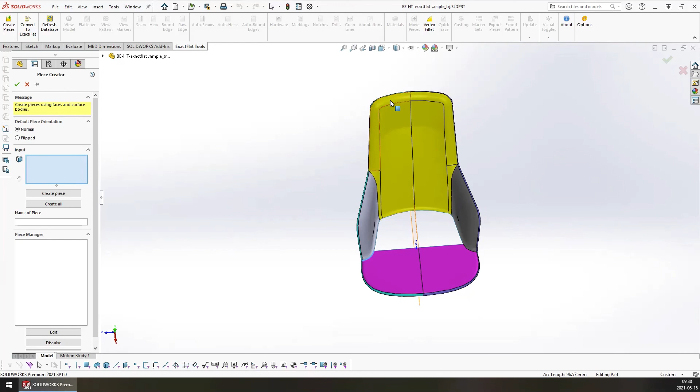With the piece creator, what we can do is simply start selecting faces here, and this will allow us to effectively knit these together. Internally, we're just using the SOLIDWORKS knit surface feature to knit all of these faces together.

As we start picking faces, we're going to notice there is a red arrow emanating from the pattern pieces. This red arrow indicates the facing up direction of your pattern piece. If this fabric were to be laying down on a cutting table, this red arrow would be pointing up towards the ceiling, because this is the finished side of the pattern piece, the side that we actually want facing up towards the ceiling.

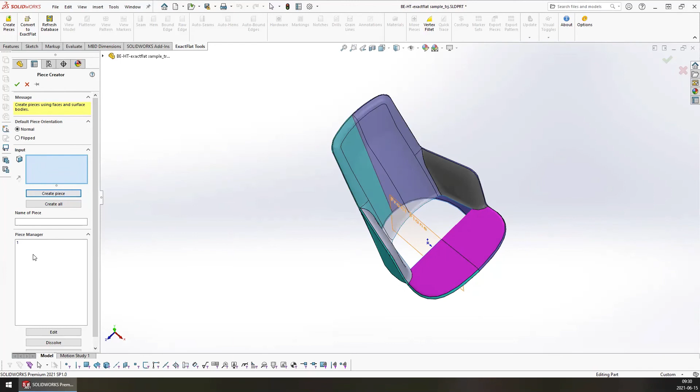All we do is click on the red arrow, and that will flip the orientation of the pattern piece. Once you have your faces selected, you can click the Create Piece button, and this will create your pattern piece. Now down here in the Piece Manager, we have a new piece. Piece number 1 has been added to the Piece Manager.

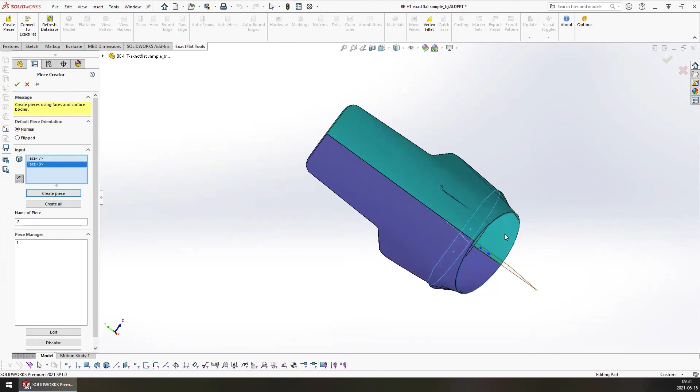We can continue carrying on, selecting additional faces, and as I select additional faces, once again we have that red arrow emanating from the piece. And again, this is in the wrong direction, so we're just going to click on the arrow, and that will flip the orientation of the pattern piece.

If you're noticing that every single pattern piece is being created with an incorrect orientation, you can change the default piece orientation option up here from normal to flipped, and that will automatically flip every single piece orientation as you start creating the pattern piece.

So we have our 2 faces selected, so we will go ahead and click the Create Piece button here to create a new piece in the Piece Manager. You can also use the Enter key on your keyboard to quickly add pieces to the Piece Manager. Once you've selected all your pieces, you can just press Enter, and that will very quickly do the same thing as clicking the Create Pieces button.

As we add our pieces, we will also notice that the pieces are automatically being named for us, in sequential numbers. This name is being generated from the ExactFlat options. You have quite a bit of control over how your pieces are being named, so you can change the template and the format of this name to include things such as file name or the body name, or even SOLIDWORKS custom properties. We will look at that in more detail tomorrow when we talk about the ExactFlat options and the ExactFlat database manager.

If we want to change this name at any time, we can do so either after the piece has been created or while the piece is being created. So for this piece here, if we wanted to give it a more meaningful name, we can simply change the name to whatever we want. So for this piece here, I'm going to call it Inside Right. And because we haven't actually created it yet, we'll go ahead and press Enter on our keyboard to create the piece.

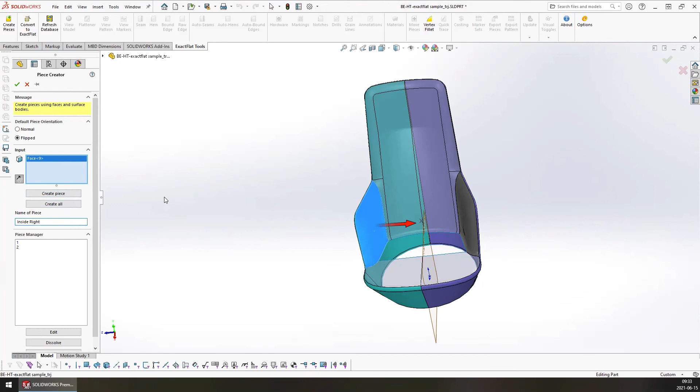We'll go back to these 2 pieces here, and we'll rename these pieces so they're a little more meaningful. So we just select the piece in the Piece Manager, bring our cursor up here, and change the name of the piece. And we'll do the same thing for this one, and we'll finish creating our pieces here.

Once your pieces have been created, we can click the green check mark here, and that will close the PMP and insert the piece creator feature into the feature tree. This is a good point in the workflow to examine your model.

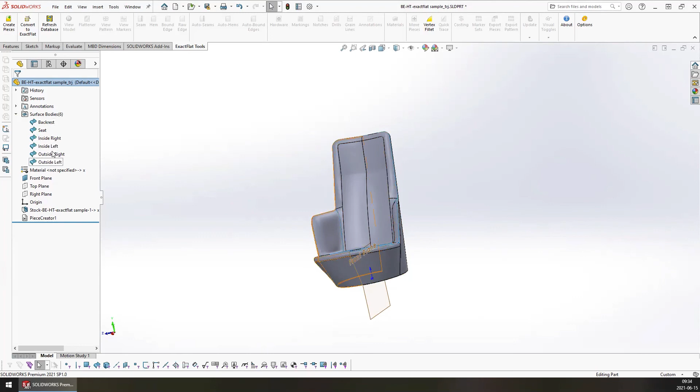You want to make sure that there aren't any holes or gaps, and if we look in the feature tree, specifically the surface body folder, we can see the results of the knit surface feature. Every single piece has now been created as a separate surface body. So we can select each surface body one at a time, and rotate around to make sure that we don't have any extra faces included in our surface body, and to make sure that there aren't any holes or gaps in the surface body. So it looks like our selections are all good.

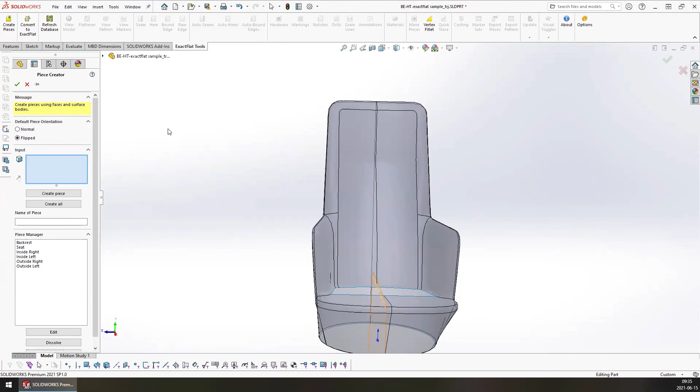If we did notice an issue with the piece selection, we can always go back to the Create Pieces button. We can open up the Piece Creator again, and we have full access to our pattern pieces. So if, for instance, we realize that we no longer need the seat here, we can simply select the seat from the Piece Manager, and we can dissolve that part, and that effectively removes it from the Piece Creator.

If we realize that we forgot to add a part, or if we forgot to include a face in a part, we can simply select that part. So for now, we'll add the seat pieces to the inside pieces. We can select a piece here, edit that piece, and now we can either remove the undesired face by holding Control and clicking on it, or add additional faces by simply selecting them. Once we've made our change, click the Update Piece button to save changes.

We don't actually want to join these two pieces together though, so I'm going to once again edit my piece, and I'm going to remove that face and update my piece. Similarly, if we forgot to add pieces, we can just create a new piece by selecting the faces, give it a name, and click the Create Piece button.

We can now close the Piece Creator and accept changes, and all of our pieces are formed. After we have finished with Piece Creator, we can now start the flattening process. The entry point to the flattening process is the Convert to Exact Flat button.

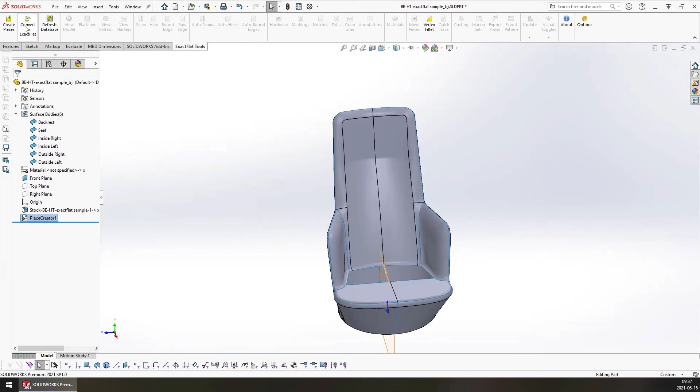Just a reminder, once we click the Convert to Exact Flat button, we will no longer have access to the Piece Creator. We will not be able to modify our pieces or add or remove faces. So make sure that your model is accurate and complete at this point, and then we can move on to Convert to Exact Flat. Once we're happy with our model, click the Convert to Exact Flat button, and this will start the conversion process.

The conversion process will first create a mesh from our model for flattening, and lastly we will assign a material to each piece that we have defined with the Piece Creator.

Exact Flat is a two-stage flattener, so we do our flattening in two separate steps. The first step is a very fast pre-flattener that is applied to the mesh created by SOLIDWORKS. The second stage is the optimizer, where we use the mechanical properties of the material to relax the curvature and the average energy density of the mesh to as close to zero as possible.

The second stage flattening does use the mechanical properties of the material, so that's why we're being asked to pick a material at this point. In addition to setting up the flattener, materials are also used to set up your markers. So each material not only contains a name and description, but it contains the mechanical properties for flattening, as well as the dimensions of the material for nesting.

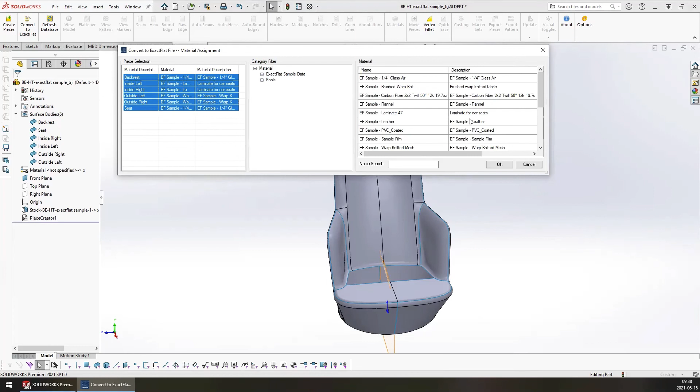From the material selection, we can assign one single material to every single piece, or if your part is designed with multiple materials, we can pick individual pieces here and assign different materials to different pattern pieces. So you can assign as many materials as you want to your different pattern pieces. The only important thing here is that we do assign a material to every single pattern piece. So for this particular model, we're just going to assign laminate for car seats to every single piece here, and we will go ahead and click OK.

After the conversion process, we have our chair, and we can see that the color has changed to pink. So pink is the color associated with the material we selected. If we had selected multiple materials, then we would have seen multiple colors on the car seat, and each pattern piece is color-coded for the specific material that was selected for it.

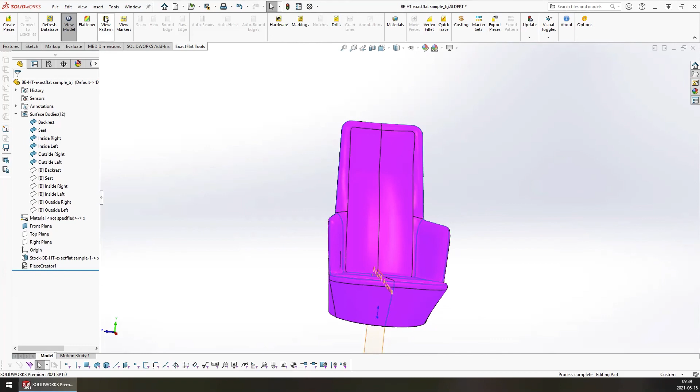Once the conversion process is done, we now have access to the flattener and the View Patterns buttons. So now we're going to click View Patterns, and this is going to bring us to our 2D flat patterns.

From here, we can see the initial unoptimized 2D flat patterns. As I mentioned previously, ExactFlat is a two-stage flattener, so the results we are looking at are simply the results of one of our pre-flatteners. We haven't finished the flattening process. We still need to optimize the shape of our pattern pieces.

To do this, we are going to open up the ExactFlat flattener. And once open, we have access to all of ExactFlat's flattening controls.

The flattening interface is divided into three main areas. At the top, we have our model and pattern viewports. The controls in the viewports are exactly the same as in SOLIDWORKS.

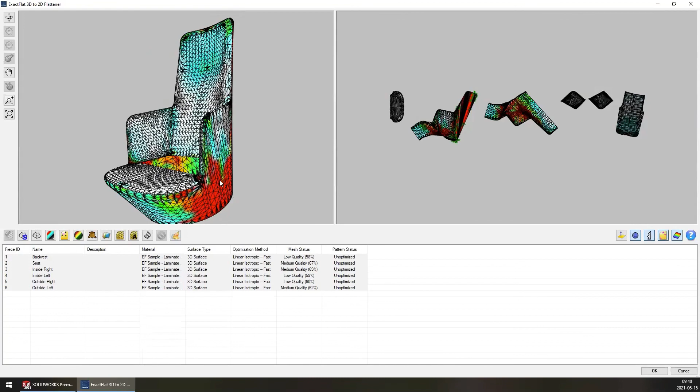We can orbit around our model by holding middle mouse button and dragging our mouse. We can zoom in and out by holding Shift and using our mouse up and down. And we can pan around by holding Control and pressing middle mouse button to pan around our object. The controls are exactly the same in the pattern viewport, with the only difference being we can't orbit around our objects. The pattern viewport is locked to an orthographic projection, but we can still zoom in and out, and we can still pan our camera.

Below the viewports, we have our toolbar. On the left, we have our flattening controls, and on the right, we have our highlights, where we can turn on or off different visual cues. And below that, we have our pattern piece list.

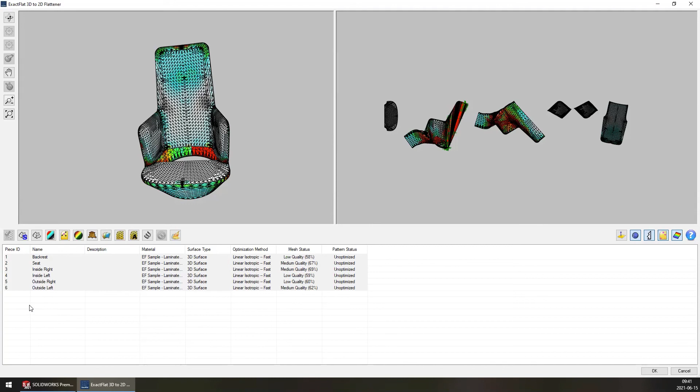Whenever we click any of the flattening controls, that operation is going to be applied to whichever pattern piece is selected down here. So by default, every single pattern piece is selected. However, if we only want to apply an algorithm to a very specific pattern piece, we can single that piece out, or we can select multiple pattern pieces.

We do have multiple highlights that can be turned on or off, and they can be used for many different things. Starting with the first highlight here, this is our piece normal. We can use this to show the normal direction of the pattern pieces, and this is functionally equivalent to the arrow that we saw in the piece creator.

If we turn this on, we will see little black lines emanating from the pattern piece, and these point out towards the facing up direction. So in most cases, you want these lines coming out of your pattern piece. You don't want them going towards the inside. If you see those black lines on the inside of the pattern piece, usually it means your face normal has been reversed, in which case you're going to have to undo the flattening process and then fix your piece orientation in the flattening window.

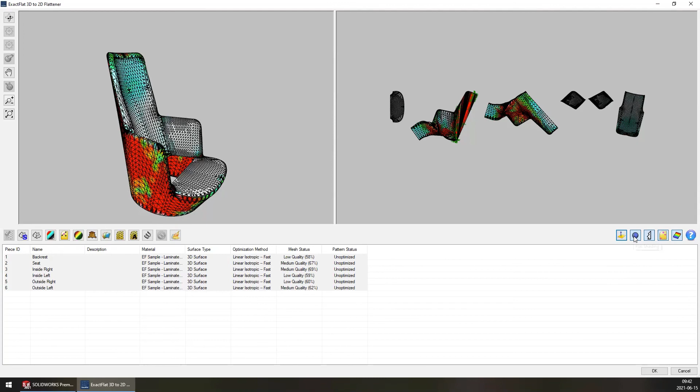The second option here will turn off flat shading, so it will introduce lighting into our document. In most cases, it just makes our model look gray, so it's not a very useful option, so we're going to turn this off. Our third option will turn on or off the edge triangulation, and this is useful if we are trying to examine the strain of the model.

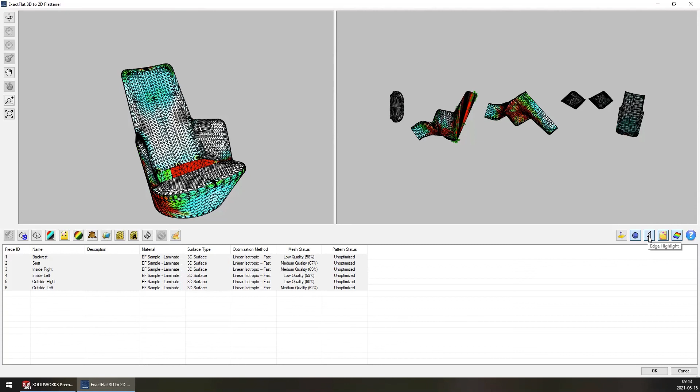It's often easier to examine the strain of the model without the triangulation visible. We can also use the edge highlight and turn it off to make it easier to spot folds and wrinkles in our pattern. If we look at this piece over here, this would be a good example of a pattern piece with folds and wrinkles. Whenever we see these green crosses and inverted triangles, that's an indication that we have a fold or a wrinkle in our pattern piece.

The fourth option is the wrinkle highlight. We don't ever recommend that you turn this off. If you turn it off, it simply hides the folds or wrinkles. But because folds and wrinkles are considered to be patterning errors, it is not recommended to turn that off.

The last option here is the strain map. If we turn this off, we no longer see the strain map on the pattern piece, but it's very useful to turn that off if you're looking for folds and wrinkles. They're very obvious on this piece here, but if our pattern only had one small fold or wrinkle, then turning off the edge highlight and the strain map will make it very easy to pick that out and spot the fold or wrinkle.

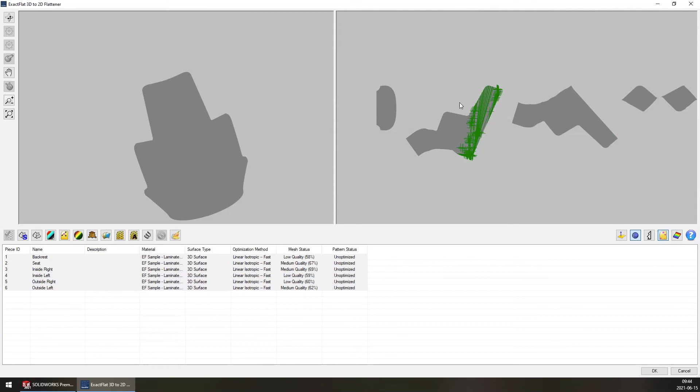So we are going to turn back on the strain map, and we are going to turn on our edge highlight.

Moving on to the flattening controls. Our first group of buttons here are our pre-flatteners. Starting from left to right, we have our Smart Fracture pre-flattener, our Fracture pre-flattener, Stretch Initial, Stretch Minimal or De-Wrinkle, Stretch Round, and lastly, Pelt.

The pre-flatteners are simply 2D algorithms used to take the 3D shape of the mesh and generate a 2D flat pattern. The flat pattern created by the pre-flatteners is not an optimized flat pattern. However, they are very fast and they're used to generate a 2D flat pattern that hopefully doesn't have any folds or wrinkles. We have many different algorithms because different algorithms work better on certain types of geometry, and because of the nature of folds and wrinkles, if one algorithm produces a fold or wrinkle, you can try a different algorithm to produce another flat pattern without folds or wrinkles.

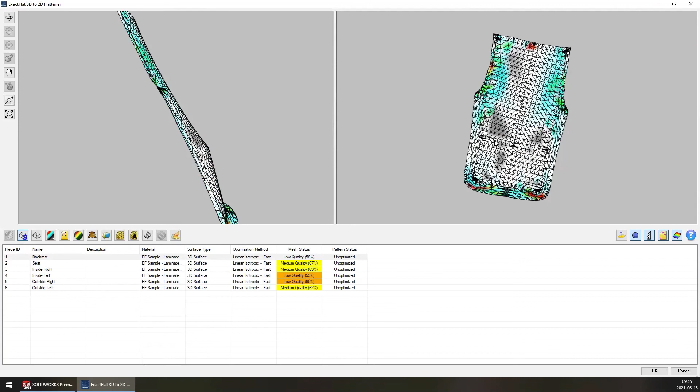Starting with fracture, every time you click the fracture button, we will generate a new unique flat pattern. So we're going to isolate on the backrest here and look at the effects of the pre-flatteners on this particular part. Every time I click the fracture button, we're going to see a new unique 2D flat pattern being generated. In this case, we've got fairly low strain spread through the part, and we don't see any folds or wrinkles. The starting point for fracture is always randomized, and as we fracture a part, we're pushing the material outwards from the starting point. So every time I press this button, we're randomly picking a new starting edge, and we're pushing the material outwards from that starting point.

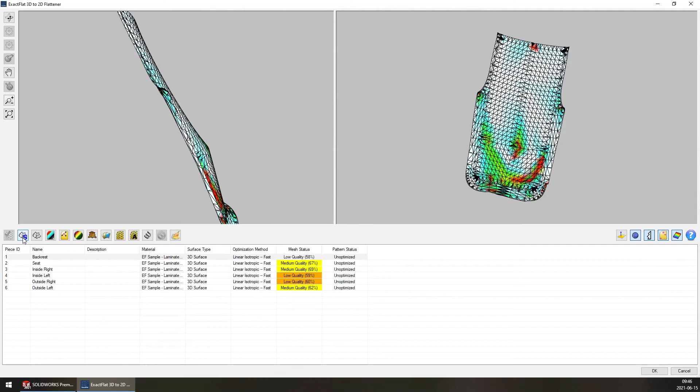Fracture is very similar to Smart Fracture. It doesn't have the same built-in intelligence that Smart Fracture does, so it tends to produce patterns that have more folds and wrinkles, whereas Smart Fracture, when it detects a fold or wrinkle, will attempt to correct that and then finish its algorithm.

Our stretch initial algorithm works very well on pattern pieces that are comprised of 1,000 vertices or fewer. However, once we have more than 1,000 vertices, the results become unpredictable, and we typically start to see this type of result here.

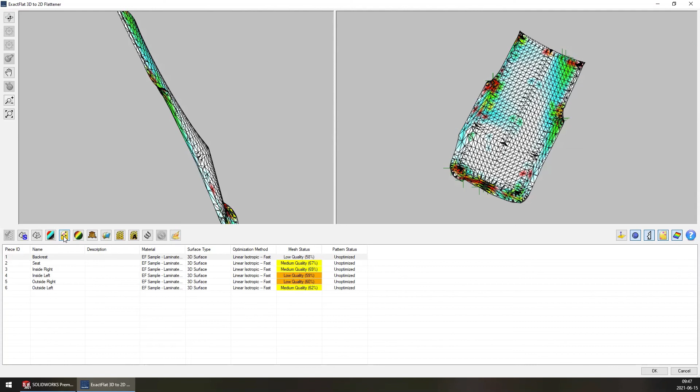De-wrinkle works very well when we have a pattern piece with a shape that is very ideal, such as this, but we have a few folds or wrinkles in it. It is similar to stretch initial, so just like stretch initial, it works really well on pattern pieces under 1,000 vertices. But once we have more than 1,000 vertices, the results become unpredictable. So we'll try de-wrinkle on this piece here, and in this case, it removed most of the folds or wrinkles, but it still produced this spike down here, which is not ideal.

Our round algorithm does exactly what it sounds like. For this one, we'll move to one of the side pieces here, which have fewer vertices. This basically turns your pattern piece into a disc. It's not very useful for this type of shape. However, if we were flattening something like a dome, then this algorithm would become very useful. If all else fails, if every single algorithm fails to produce a pattern free of folds and wrinkles, then round can be used. It might take a little bit longer to optimize, but the important thing is that we don't have any folds or wrinkles when we start the optimization process. So round can be used to get a pattern if no other algorithm is going to succeed.

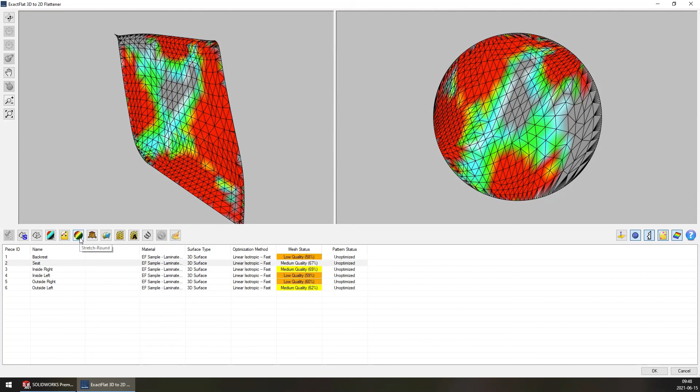Moving back to our backrest, our last algorithm is PELT. This algorithm tends to produce patterns that have moderate strain, but it is almost always guaranteed. Fracture and Smart Fracture tend to give patterns that have the least amount of strain, but they only work on developable surfaces. As you move away from a developable surface, the chance of success with Fracture and Smart Fracture starts to fall. Stretch initial, de-wrinkle, and round only work really well on low vertex count pattern pieces. As soon as you get more than 1,000 vertices, they tend to fail. And then the last one is PELT, which tends to work well on all pattern pieces. However, it tends to produce more strain.

So strain is calculated for every single pattern piece, and as we look at our pattern piece here, we can see different colors on it. If we look at our model as a whole, we can see a rainbow of different colors, and we actually use the color to represent strain and sag on the pattern pieces. As we look at our pieces here, we can see white, cyan, green, yellow, and red, and we use white to indicate no strain or sag on the pattern piece.

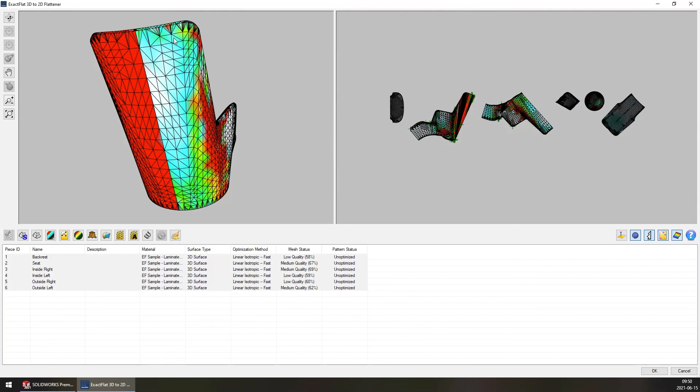So if we had the perfect pattern, we would expect to see the entire surface area of the pattern as white. As we move through the spectrum, cyan represents up to 5% strain, green is up to 10%, yellow is up to 15%, and red is 20% or more.

This allows us to just very quickly glance at our pattern and visually tell how much strain is on that pattern. Strain can best be thought of as how much you're going to have to stretch your material to get it to fit the original shape.

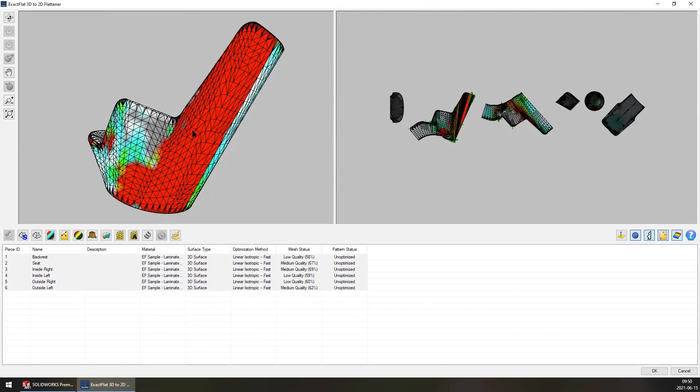So if we look at this piece over here, we have a lot of red on the pattern piece, and that's telling me that the surface area of this section of the piece is much smaller than the actual 3D model. The surface area of the 2D pattern piece is much smaller than the surface area of the 3D model.

So if we were to cut this pattern piece out and try to fit it to the chair here, we'd be stretching our material 20% or more to get it to fit, and ultimately we'd probably tear the material. So we can use the strain map to very quickly tell us how accurate our pattern is, what the quality of the pattern is.

Similarly, the seat pattern right here is pretty much all white. So if we were to cut this out, visually this tells me that we'd have pretty much a perfect fit here. We wouldn't have to stretch our material to get it to fit. It would be a very natural fit.

So with all this in mind, our goal is to eventually optimize our pattern pieces to give us our final optimized shapes. In order to do this, we first need to use a pre-flattener to generate some kind of 2D flat pattern, and this is in most cases done automatically for you during the conversion process. However, if you have folds and wrinkles here, these do need to be fixed before we can optimize.

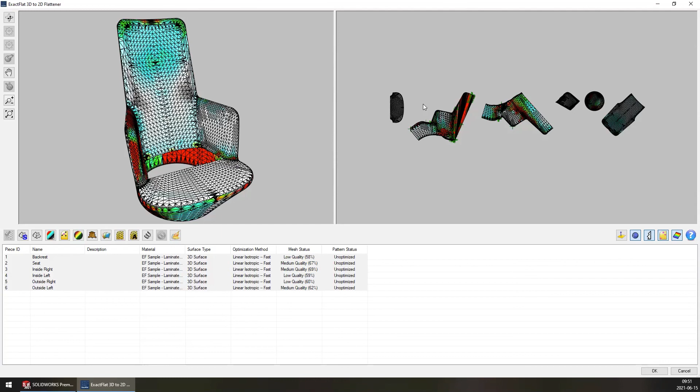So in the case of these pieces here, we need to remove the folds and wrinkles before we can optimize, and the way we do that is just with a different pre-flattener. So for this piece here, we can try our Smart Fracture. This piece is fairly close to a developable surface, so Smart Fracture gave us a pretty nice looking result here.

We can see from the colors that we have fairly low strain all throughout the pattern piece. We're seeing mostly white. We do see a bit of color in these areas here, but overall this is a very good looking pattern, so we can stick to this pattern here.

We'll do the same thing for the outside left. Again, we have folds or wrinkles here identified by the green check marks, so we are going to try a different pre-flattener. We will try Smart Fracture, and again we've removed the folds and wrinkles. We've lowered the strain on the pattern piece, so this is a good starting point.

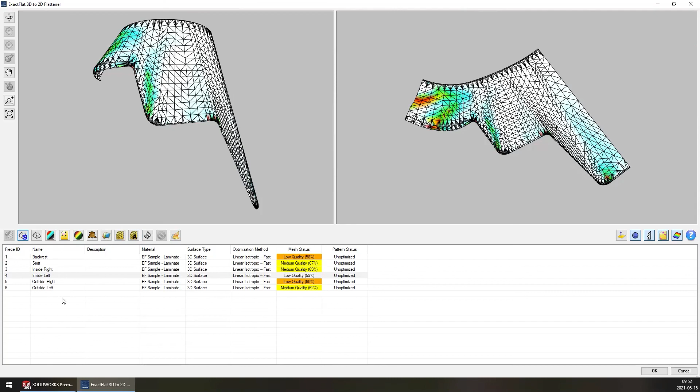As we look at our whole model, we don't have a lot of pattern pieces. Our seat is still a circle, so we'll focus on the seat and do Smart Fracture to that. And now we have a much nicer looking pattern there. So in terms of optimization, this would be a good starting point.

We've used the pre-flatteners to generate a 2D pattern, and we've used them to remove the folds and wrinkles from the pattern piece. Additionally, as we use the pre-flatteners, we also reduced the amount of strain in the pattern pieces, which is ideal for optimization.

So our three main goals for the pre-flatteners are: first and foremost, we want them to generate a 2D pattern for us. Second, we want to use them to remove folds and wrinkles from the pattern pieces. And third, we want to use them to reduce the strain as much as possible before optimizing the pattern piece.

The performance of the optimizers, our second stage flattener, is dependent on a couple of different things. First, it's dependent on the number of triangles or vertices being optimized in the mesh. Second, it's dependent on the amount of strain in the mesh that has to be resolved.

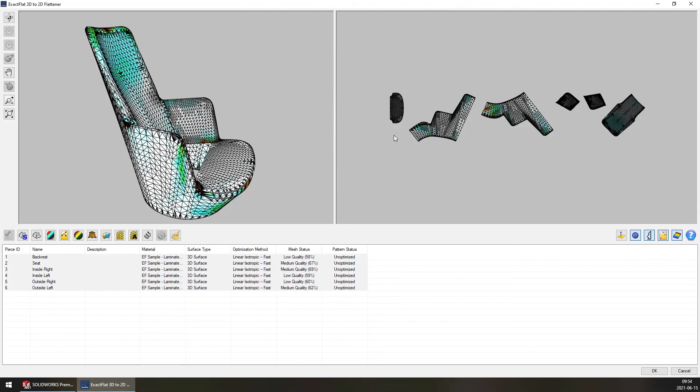So this ties back into our pre-flatteners. As we pre-flattened our side pieces here, the color went from red to pretty much white. So if we had optimized them as pure red, that's 20% or more strain, it would have taken longer to optimize than what we have now with them being pure white.

The more strain you can remove with a pre-flattener, the better. In a typical workflow, you would open up your flattener window and run one of our uniform remeshers, which we'll look at next, to reduce the triangle and vertex count of your mesh. Then you would use a pre-flattener to remove any folds or wrinkles in your mesh, and also to reduce strain, since pre-flatteners are so fast we can use them for that. Then we can ultimately optimize the pattern pieces.

Moving on from our pre-flatteners, our next grouping of tools is the material editor. If during the conversion process you accidentally click cancel, or forgot to assign a material to a pattern piece, you can do that in two different ways—we'll look at the other way after we're finished with the flattener window. If you forgot to assign a material, you can click this button, which opens the material selection interface and lets you assign a material to your pattern piece.

As I mentioned previously, materials contain the mechanical properties of your fabric. You need to assign a material to your pattern piece in order to optimize it—that's the second stage flattener. You will not be able to do that until you assign a material to your pattern piece.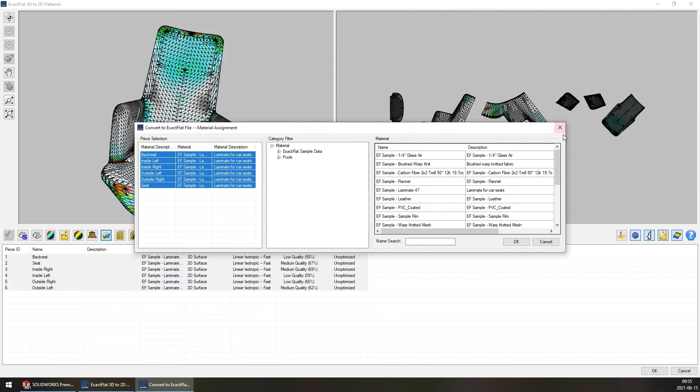Our next grouping of icons are our remeshers. We have our uniform remesher and our adaptive remesher. These two tools have the exact same goal: they analyze the curvature and 3D shape of a mesh and produce a new mesh over the original with a lower polygon or vertex count. The two remeshers function slightly differently from one another.

With the uniform remesher, we typically set a target vertex count and some fidelity constraints, which we change in the ExactFlat options—we'll look at how to change these tomorrow. So with this tool, we set a target vertex count, and the uniform remesher will remesh to that target count.

The adaptive remesher differs in that we simply specify the maximum allowed distance from the old mesh to the new mesh. We can set that maximum allowed distance in terms of surface to surface, or boundary to boundary, and we also set the minimum allowed edge length of any triangle edge. Using that information, the adaptive remesher automatically determines how many triangles to place on the mesh to minimize triangle and vertex count while maintaining the curvature of the mesh.

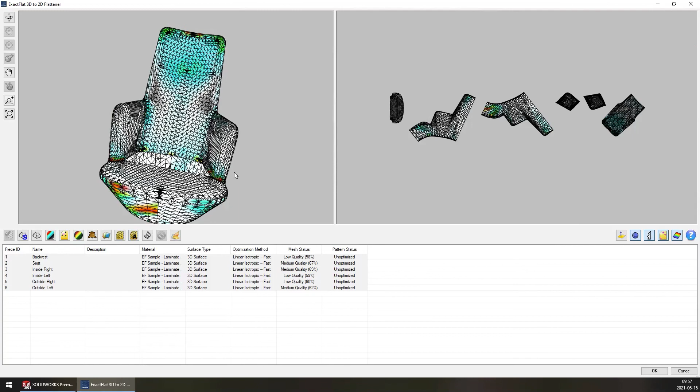In a normal workflow, I'd recommend using the adaptive remesher—it typically produces a really nice looking mesh. But for this particular seat, because of the heavy double curvature, especially around the arms, and the complexity of the triangulation, we actually get a better result using the uniform remesher. So for this chair, we're going to use the uniform remesher, even though in a normal workflow we'd recommend the adaptive remesher.

Our next icon is the optimize icon. When we click this, we launch the optimization process—we'll look at the remeshers and the optimize icon in more detail once we finish up with our toolbar. When we click this, it starts the optimization process, which relaxes all the strain on the pattern pieces to as close to zero as possible, minimizing the average energy density across the pattern.

Our next icon here appears if we are running one of the remeshers or the optimizer—this will halt the optimizer or the adaptive remesher. So if you start a process and realize you're not ready, say I accidentally click the optimize button before I'm ready, I can cancel the optimization and it won't apply any changes to the pattern pieces.

Our last icon here is the broom icon. If we do some kind of operation—let's say for this chair I know the adaptive remesher isn't the best choice, so I accidentally click that and want to undo the effects of the adaptive remesher—this is the tool to use.

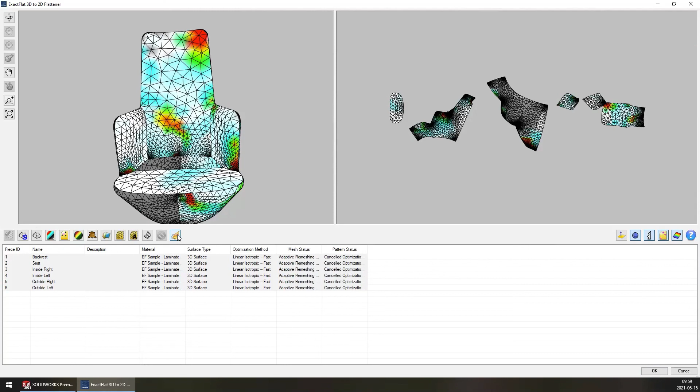I can click the broom icon here, and this will essentially restore the original input mesh that was generated by SOLIDWORKS. After clicking this, I'm going to see my original mesh being restored. There's a lot of different buttons here.

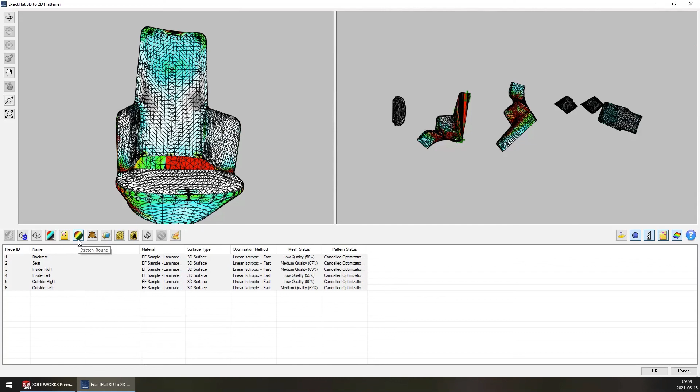However, in a typical workflow, you don't need to press all of them. The only time we really need to play with the pre-flattener buttons is if we notice any kind of fold or wrinkle on our pattern, or if we have an extreme amount of strain on it. If we saw after remeshing or after flattening one of our pieces was red like this, that would be a good use case for using a pre-flattener on that piece.

But in a typical workflow, all we do is when we open up the flattener window, we would remesh our model, and then after remeshing, we would optimize the model. So even though we have all these controls here, in a typical workflow we only press 2 buttons.

After opening the flattener window, normally what we do is we just remesh. In this case, I'm going to use the uniform remesher. As this is running, we can see it's reducing the triangle and vertex count. Once that's finished, we would then optimize our pattern pieces.

So we'll start the optimization process, and very quickly we are going to see ExactFlat take over, slightly changing the shape of our pattern pieces. As the shape is changing, we're going to turn our edge highlight off to make this easier to see.

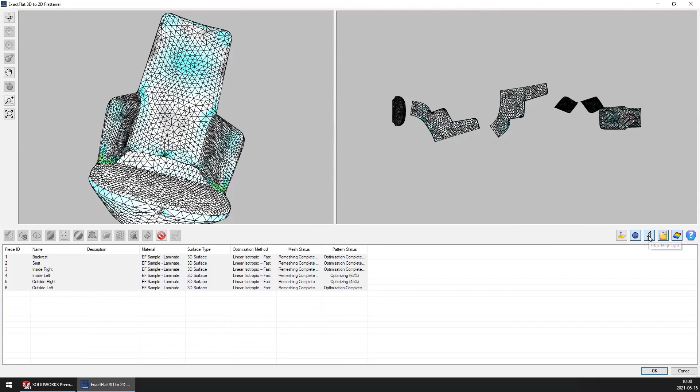We can also see the strain on the pattern being relaxed and minimized, and we can tell that just by the color of the pattern pieces. For most pieces, we have mostly white, indicating no strain. We have tiny bits of cyan on our pieces, which tells us we have up to 5% strain. In some pieces, we actually have a bit of gray.

Gray represents sag on the pattern pieces. If we see sag, that tells us we have a bit of excess material, and that may manifest itself on the final sewn product as puckering or fingers of material, just because there's an excess of material in that area. We can use this to help us make decisions on how to refine our pattern.

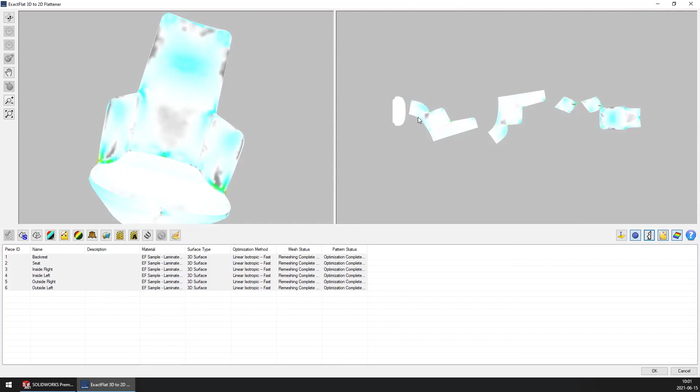If this is okay for your pattern, then you don't have to make any change. But if you don't want any sag, let's say right here, this may be an indication that we might have to split this part into multiple pieces, or we might have to add a dart or a relief cut.

And we can do that simply by undoing the flattening process, and we can split our part either in half, or we can split out a small dart of material and then redo the flattening process without that dart of material. At this point, we have remeshed our part and we have optimized it.

So assuming we don't have any folds or wrinkles and our part has been sufficiently optimized, we can then click the OK button, and this is going to update our planar surfaces in the SOLIDWORKS environment with the results of our flattening process.

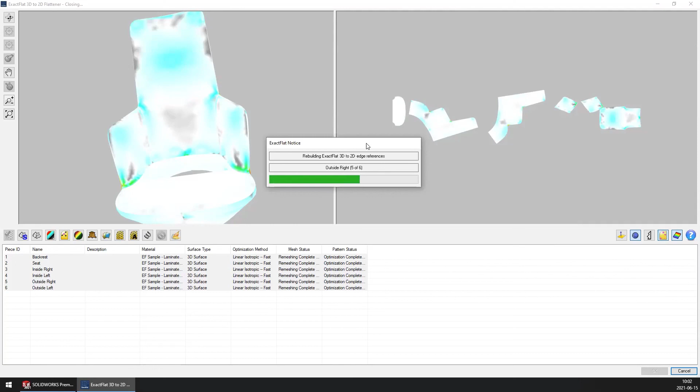After flattening, we have our optimized 2D pattern pieces here in the pattern viewport. From here, we can start our patterning process. It's difficult to really tell where these different pattern pieces go and how they sew together, so the first thing we normally recommend is using the Move Pieces tool to arrange our pattern pieces.

The tool has a variety of different modes. The first mode is the translation tool, and this tool allows you to simply drag and drop your pattern pieces. So I'm dragging this piece around. We can see the gray highlight of where my pattern piece is going to go, and when I release my mouse button, the piece is moved up there. Internally, this just uses Move Copy Bodies, so you can manually insert your own Move Copy Bodies. However, the Move Pieces tool is a much easier way to just drag and drop your pattern pieces.

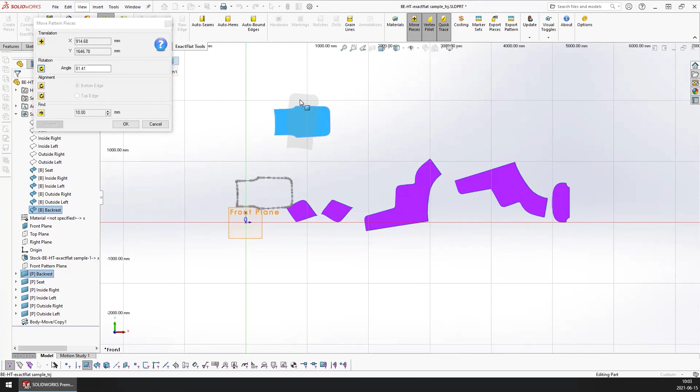We also have a rotation tool. With this tool, when it's active, when I click my mouse button and drag, I'm rotating my pattern piece. Again, we can see that gray preview of where the pattern piece is going to go. So we can rotate this to however much we want, and it will rotate our pattern piece for us.

We have two alignment tools: our vertical and horizontal alignment tools. For horizontal alignment, we can pick either a bottom edge or a top edge, and for vertical alignment, we can pick either a left edge or a right edge. We use these to help align our pattern pieces so they are in the correct orientation.

If we look at these two pieces down here, we've got very long straight edges. We know these are on the backrest, and we know these edges should be perfectly up and down.

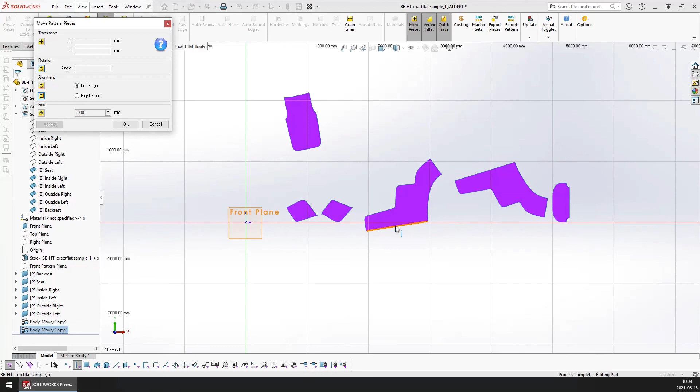So we can use our vertical alignment tool to help arrange these pattern pieces. For this piece down here, I know this is supposed to be on the left-hand side. I've got my vertical alignment tool selected with the left edge selected, and when I click and hold on this piece, we can see it's rotating so that selection point is perfectly up and down. I'm just going to move this piece up here.

Our last tool is our Find tool. This tool is used to find neighboring pattern pieces. We can set an optional offset here. I like to give myself a lot of extra material, so I'm going to change this to 300 millimeters to give myself a lot of space.

When I click on an edge, again, I'm going to click and hold. We have our preview on the left-hand side, and we also have a green dot appearing on that edge. For this particular edge, because it's pretty much straight, we're not going to notice a big difference. But as I move my cursor up and down, we can see our gray preview rotating, so the pattern piece is tangent at this green point.

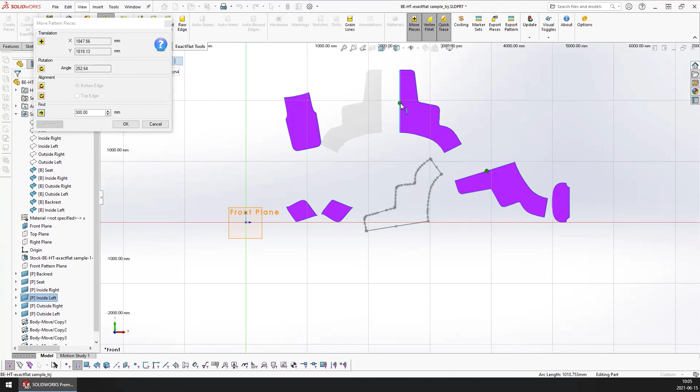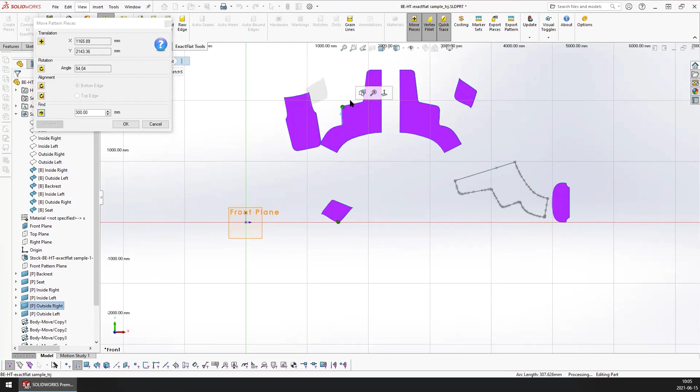We'll notice a bigger difference over here as we start finding this neighboring piece. As I move my mouse, it's rotating my pattern piece, so my two pieces are tangent at that same point at a distance of whatever my offset was set. Once we have a desired location set, just release your mouse button and Exact Flat will snap the pattern piece to that location.

Find our top piece up there. And then this piece kind of sits down here, but it might be better just to move that up here. So what I'm going to do is use my bottom edge alignment tool, rotate that to a bottom edge, and just translate this piece up here like that.

So now that our pieces have been arranged, it becomes pretty clear how this sews together, so we can start adding our seams and hems. If after using the Move Piece tool or any other tool you notice that your seam and hem tools are not available, just click in the empty white space here and that will reactivate the toolbar for you.

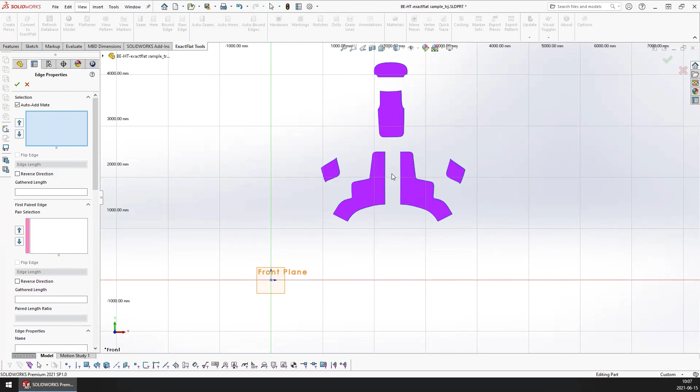Now that we have access to our seam and hems tool, we will open up the seam tool and start to add seams to our pattern piece. It's very important that you think of seams as individual sewing operations - you have to create your seams the way they would actually be sewn together in the assembly process.

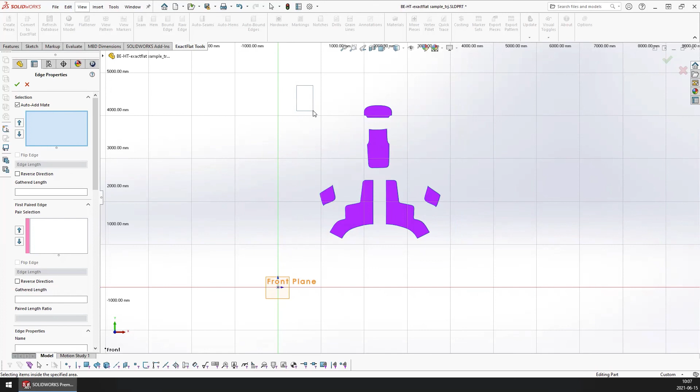A lot of times, people will tend to just rectangle select everything, and if you do that, you'll probably succeed in adding your seam allowance to your pattern pieces. However, none of your notches are going to align, simply because you're considering every single edge in the document as one side of a sewing operation. So you need to consider this as a sewing operation, and when selecting edges, you want to select them in the order that they would be sewn together.

So if we zoom in on this part here, we have one really big long edge in the center, but a very small tiny edge down here at the bottom and a tiny edge at the top. So we want to make sure we select them in order. We'll start here at the bottom and select that edge, and as I select it, we have a green dot showing the start of that edge, and a red dot showing the end of that edge.

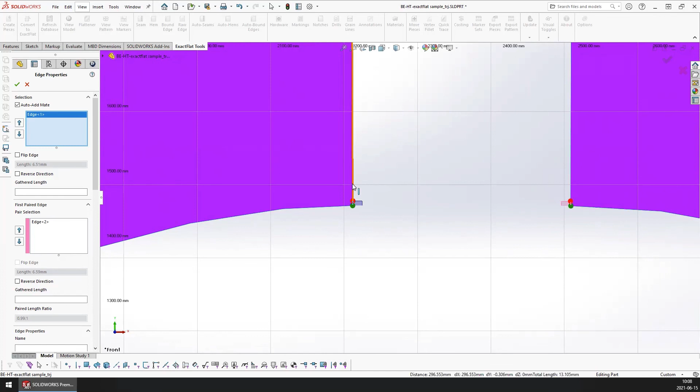We can also see the additional material that has been automatically added to our part as part of our seam allowance. If we zoom out, we can see on the neighboring pattern piece we have the exact same information being shown - our green dot at the bottom and red dot at the top. As we start selecting additional edges, we can see our seam being expanded, and we'll make sure we pick our final edge. So Exact Flat automatically recognizes and finds the neighboring edges for us.

It's really important that we want to make sure that the seam starts and stops on the exact same side. So in the case of this particular edge, both our green dots are at the bottom, and on both sides we're sewing up the pattern piece and stopping at the red dots up here. If for whatever reason one side was reversed and not in the correct orientation, in the seam PMP we can simply click the reverse direction button to reverse the direction of one of our sides.

Scrolling down, we can do additional things to our seams. If, for documentation purposes in SOLIDWORKS drawings, we wanted to add a seam table with more specific information, we can give our edge a name. For the purposes of this demo, I'm just going to leave this empty. But if we were to give our edge a name and add an edge table, the edge name would appear in that edge table for descriptive purposes.

Below that, we have our seam properties. This is where we can adjust the amount of additional material being added to our seam. For this particular file, my default is a 1/2 inch pinch. If I wanted to change this, I can do that by changing my seam type. If I select 6mm join, we can see material has been removed from our seam allowance on both the right and left hand side. As I pick additional seams, we can see the amount of material changing depending on my type of seam.

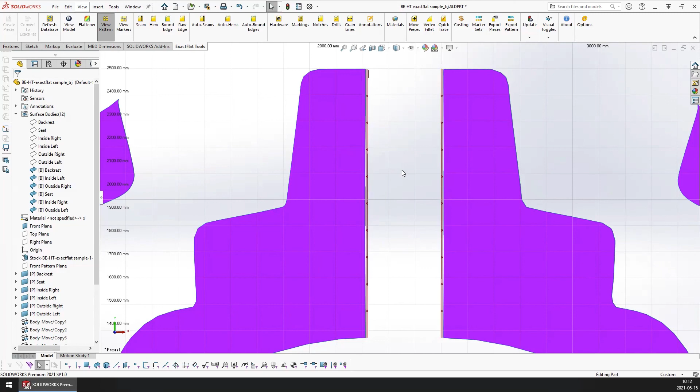If you notice that you already have a seam there, just click the red X to close the PMP, then click in the white space to deselect your edge. This will allow you to create a new seam. Another option is to pre-select your edges first, which guarantees you will open your seam PMP in create mode, eliminating the chances of opening the PMP in edit mode.

So we're going to add the next length of seam down this side here. We select our top edges, open up the seam PMP, and ExactFlat will automatically detect our neighboring edges for us.

ExactFlat remembers the last settings used, so because we already configured our previous seam to be a 10 millimeter join with a notch chain with 9 counts, ExactFlat automatically applies those settings to every single seam created afterwards. So the previous seam settings will always be applied to the next seam.

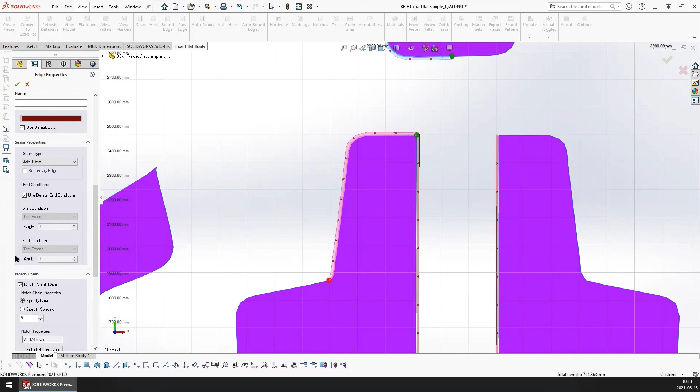We're going to have a look at end conditions and how they work. These are applied to the ends of a seam. On this particular seam here, we can see we have our green dot there, and we have 2 seams coming together. So the default end condition for most of our seams is trim extend, and what that does is, instead of having our seam simply extending from the edge, it's going to extend our seam line and trim it at the intersection point of where the 2 seams meet. We can change the default end conditions by turning off use default end conditions, and this gives us access to all of our different end condition types.

Trim extend is the default. Our other types are chamfer angle and chamfer to corner angle.

So if I change this edge to chamfer angle, we can see that we are no longer trimming or extending the edge and trimming it. The angle is always going to be a deflection angle from the perpendicular direction of the edge at that point. So 0 is no deflection, so we have basically a mitered edge here. If I change this to, for instance, 45 degrees, we're going to notice that edge is now being rotated 45 degrees inwards. So you can change your chamfer angle to whatever you want. This is very useful for hiding excess information or excess material, so you don't have a large amount of material balling or bunching up at your corner of your seam.

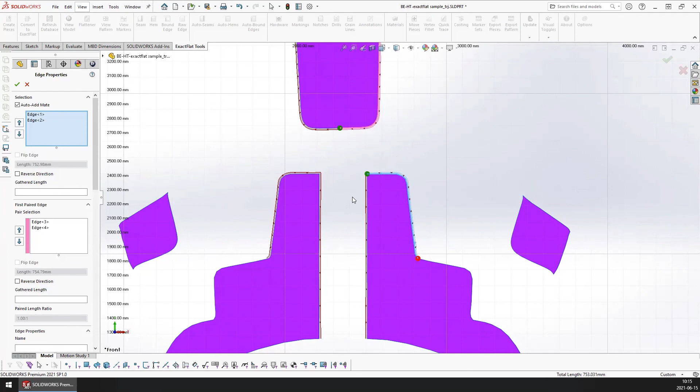So we can carry on adding seams to the remainder of the part. In most cases, because ExactFlat automatically applies the last settings used, all you have to do is select your edges, open up the seam PMP, and then you can click the OK button, and ExactFlat will create your seam for you.

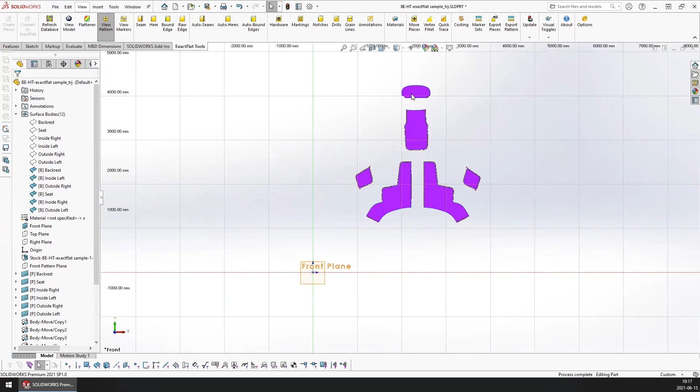For our last few seams down here, this is where parts of our cushion sew together. So we will create our seam along the front here.

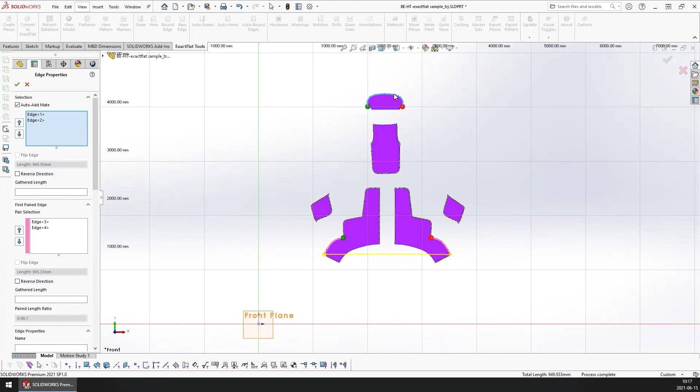And in this case, we can see our seam is actually jumping from one piece to the next. So that's telling us that even though we have one continuous piece of material here, this sews to a composite of two different pieces. This isn't necessarily a bad thing, and this is quite common. So the jumper just tells you that our seam is starting over here, and then it jumps over to this piece here.

For the bottom of our chair, we may want to add a hem or additional material to include a drawstring. So if we wanted to do that, we can use the hem tool. The hem tool is almost functionally identical to the seam tool, and they both kind of do the same thing. The only difference is the hem tool is a single-sided operation. So with a seam, we are adding additional material to two sides of the pattern piece, the right and the left-hand side. With hem, we are only adding additional material to one side.

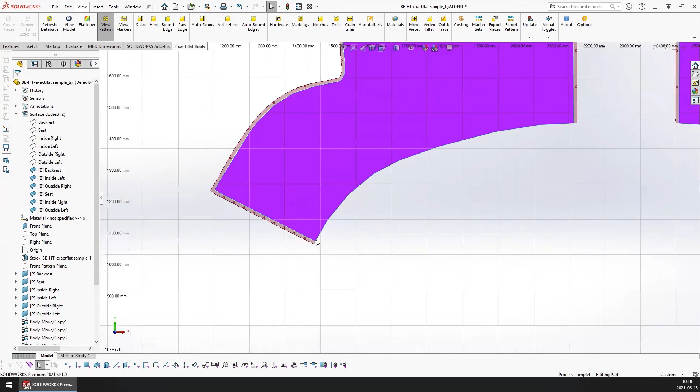So we will start by selecting our edge. Now we can open up the hem tool. And unlike the seam tool, we only have our primary selection here. Most of the tool is exactly the same. We still have our hem properties. This is where we can choose additional material, so whatever hem type you need, you can select that from the list.

For my case, I'm going to pick 2-inch hem because I want to create a nice pocket for a drawstring. And now we have our additional 2 inches of material added. If we scroll down, we have access to the notch chain for this particular part. I don't really need notch chain on my hem, so I'm going to turn that off. And now I can apply the exact same hem to this piece over here.

For this piece here, this simply sews to another part of quilting that was not included in the model. So this should actually be a seam. However, we don't have the adjacent pattern piece in the model, so I'm just going to treat this as a hem. I'm going to change this to 8 millimeters.

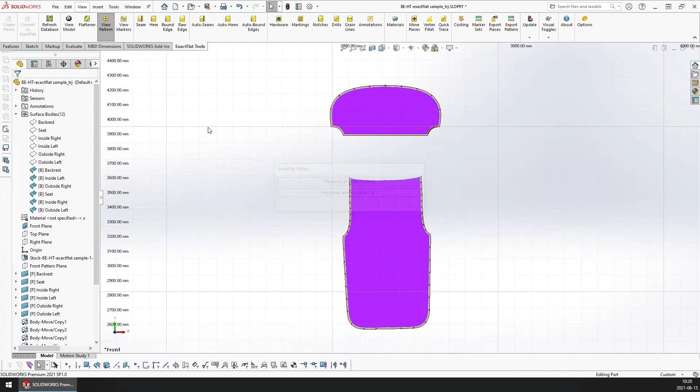So once we have applied all of our patterning information to our chair, I'm actually going to turn the notch chain off for this particular seam here. And we'll leave that alone.

So once we've added our seams to our part, we can then move on. We can start adding things like hardware and markings. And there's two different ways that we can do hardware and markings. We can either add hardware and markings in 2D, in our 2D pattern view, or we can add hardware and markings on our 3D model.

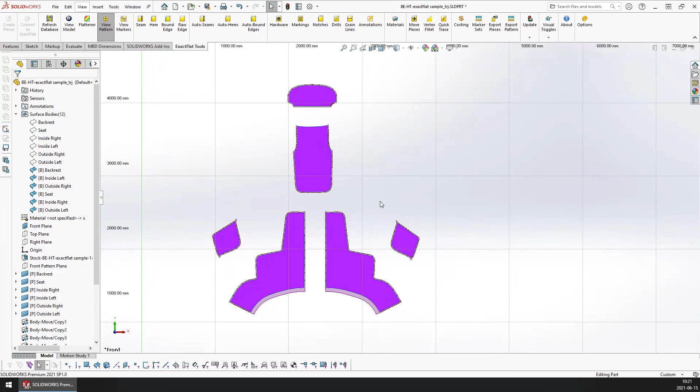And this is really a design decision with where it's easiest to add your hardware marking information. If it's easier to place this on the 3D model, then you can do that, and we can map the hardware and markings from 3D to 2D. If it's easier to simply place them on the 2D pattern, then you can do that as well. If you want to just place your hardware and markings on the 2D pattern, we can do that simply by clicking on the pattern piece and creating an in-context sketch.

For this piece, we're going to assume that we want to add some decorative buttons, both for decorative looks and to help pull the material in.

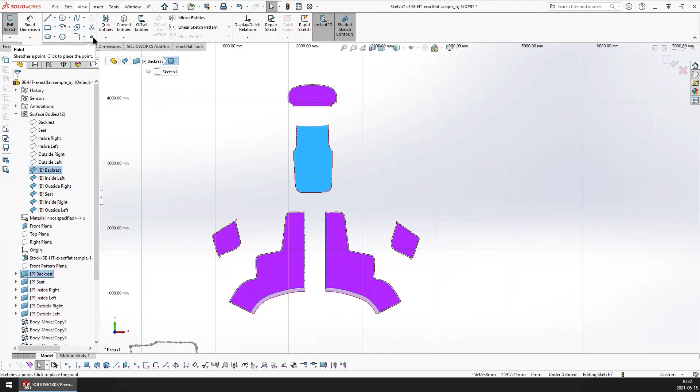So buttons are typically point entities. They are an item that is counted in terms of quantity. And for any type of item that is counted as a quantity item, we typically use a point to represent that. Conversely, if we were to use something like a piece of ribbon or piping or a strip of Velcro, any item that is normally measured in terms of length, we would typically use a spline or a line to represent that. So because we're going to be adding buttons here, these are items that you would count the quantity, we're going to use a point.

And we are simply going to place a point everywhere where we want a button here. So I'm just going to freehand draw these here. We'll add a few and maybe two more down here. And we can dimension these however we want using the existing SOLIDWORKS dimensioning tools. But for the purposes of this demo, I'm just going to freehand draw them. And now that my sketch is done, I'm going to close the sketch.

So now we have our sketch here. We have our 8 buttons, and it's in context of the pattern piece. We still need to map this sketch to the pattern piece and effectively register this sketch so it will be included as part of the DXF when we export our DXF pattern.

To do this, we just want to make sure the sketch is selected. So we've selected a sketch down there. And now we can open up either our hardware or marking tool. Because we're going to be adding these as buttons, a button is a piece of hardware. It has a physical piece of hardware item that has a cost associated with it. So we're going to use the hardware feature here.

Markings effectively does the exact same thing. The only difference is it's typically used for things that don't have a physical piece of hardware. So you would use a marking for something like an annotation text or a fold line or any kind of marking that may help or aid with the assembly of your part. So they both do the exact same thing. They both allow you to transfer sketch information from SOLIDWORKS to your 2D DXF when you export it.

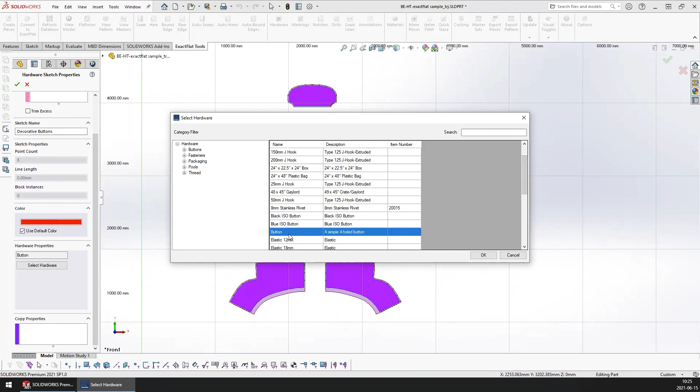Just like within the Edge PMP, we can change the default color. We skipped past this in the seams and hems, but each seam and hem, each piece of hardware and marking will have a color associated with it. This simply helps you identify what piece of hardware or marking it is in the pattern environment. Each hardware, each marking, each seam and hem will have a default color assigned to it. However, we can change the default by unchecking Use Default Color and then picking a new color.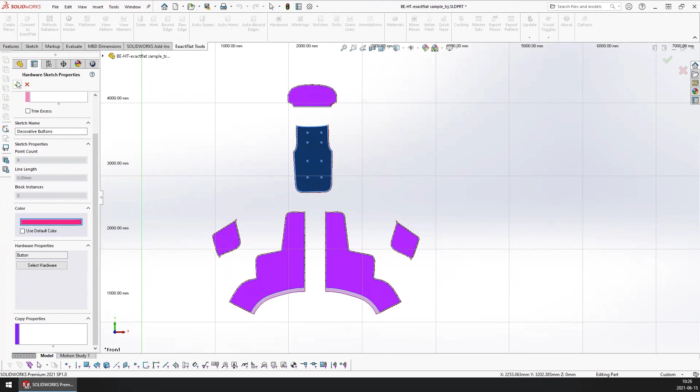So if I wanted this to appear in my document as magenta, I can select magenta. Now when I click the OK button, our sketch is going to turn to a solid color, in this case magenta, and that identifies to us that this sketch has now been successfully mapped to the pattern piece as a hardware sketch.

Down here, we have our hem with 2 inches of material to act as a pocket. We might want to add some information to help us identify where this sews to, and we can do that using a marking sketch. We can do this in either 2D or 3D, whichever is easiest. I've already shown you how to create hardware and markings in 2D.

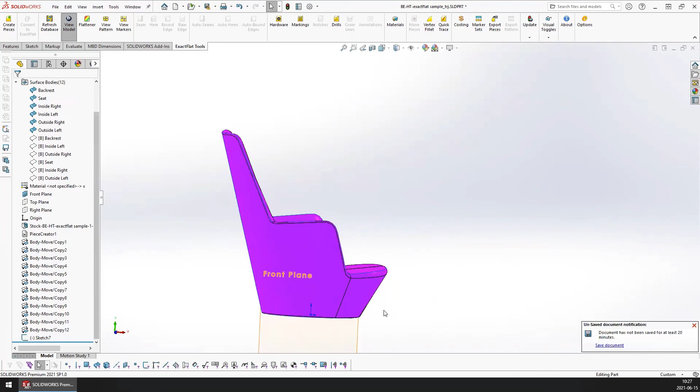So for this one, I'm going to switch over to my view model. We're going to go back to our 3D model, and I will show you how we can create a hardware marking or hardware sketch in 3D. Because we are in 3D, we want to make sure that we create a 3D sketch. So from our sketch tab, instead of just creating a new sketch, we click the down arrow and create a new 3D sketch.

From here, we can place any kind of point or curve that we want onto our model. The easiest way to create a curve directly on a surface is to use a spline. Click the down arrow and select Spline on Surface, and this will create a new spline on this surface.

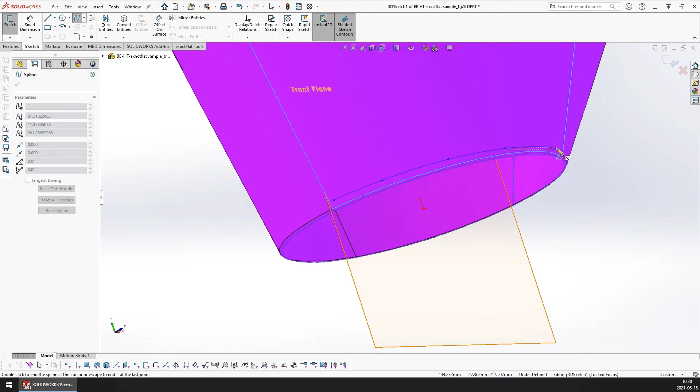For this particular piece, we're going to assume that this is a drawstring, so we might want to draw the sewing line for this particular drawstring. I'm just going to freehand draw a curve along the bottom, and we'll assume that this is the sewing line for a drawstring pocket.

Once that spline has been created, we can now close the sketch, and we can see that that curve is very clearly on the surface of the model.

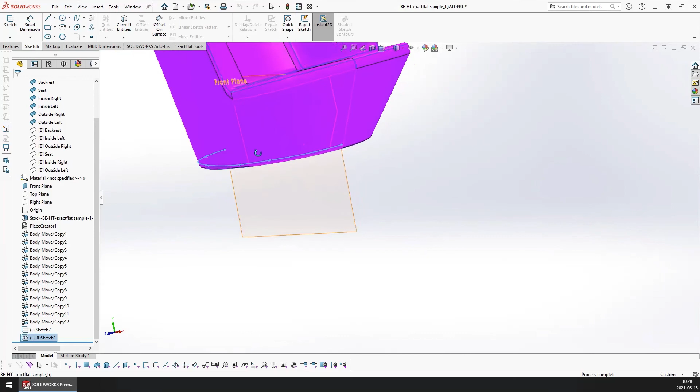You can create this sketch with whatever method is easiest for you. It might be easier to create a plane and intersect it with the surfaces. You might want to simply offset your edges. The method you use to create your sketch is not important. The only important thing is that we have some kind of sketch entity or point entities in the sketch, which can then be used to transfer either to the DXF directly or to the pattern piece, and then ultimately to the DXF.

Now that we have our sketch created, we're going to make sure our sketch is selected. We can then switch back to the ExactFlat Tools Command Manager, making sure our sketch is selected and not the entity down here.

Now we can apply this as either a hardware or a marking. Last time we did a piece of hardware, this time we're going to do a marking, and they're pretty much exactly the same. We have our sketch selection. The model piece mapping is in most cases automatically determined in 2D view, however, in 3D view you always need to pick your model piece mapping. This is just the pattern piece that we want to map the sketch onto, so we will pick our inside left piece here. Then just like with hardware, we can give this a name if we want.

If we scroll down, we have our marking properties. We're going to select marking, and we're just going to pick our fold line here. We'll keep it at fold line, but we can pick whichever marking type we want. In most cases, the marking type that you select is, again, just for documentation purposes in the drawing. Your choice here is not going to affect your DXF or the function of the tool.

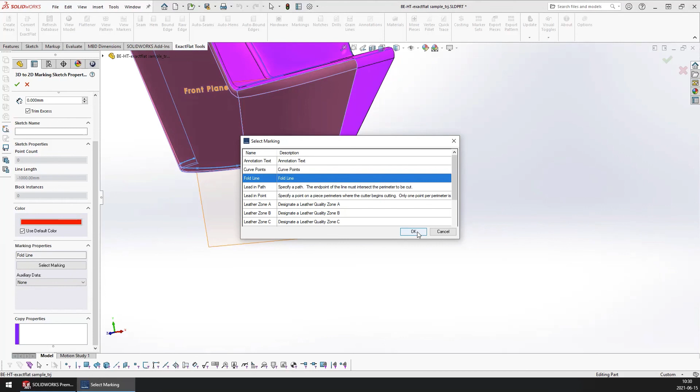When we look at the database manager tomorrow, I will show you how to create your own custom marking types, your own custom hardware types, and your own custom hem and seam types. So we will pick fold lines, click OK, and click OK again to close the PMP.

Very quickly, this sketch has now been mapped to our 2D pattern piece. If we go to View Patterns, we can now see our sketch down here has been mapped to our pattern piece.

Now that our hardware and markings have been created, the last thing we can do is add a grain line to our pattern pieces.

It's very important that we make sure our pattern is finished and complete before we add the grain line information. It is strongly recommended that you do not move your pattern pieces or add any new hardware or markings, or use a flattener, or make any kind of change to your document once the grain line feature has been added.

If you've added your grain line feature and realize you need to make a change, before you make that change you need to remove all grain lines from the document. Otherwise, you will experience unexpected results and SOLIDWORKS will probably crash.

It's also recommended at this point to save your document. So just go to File, Save As, and save your part as a unique file name.

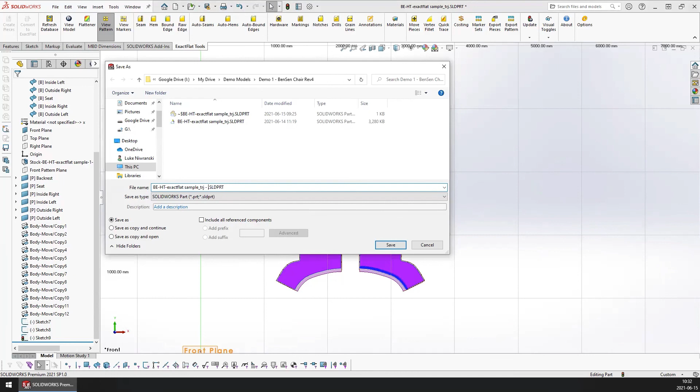I'm just going to use the default name here and give it a new name. So save often, and that will save you the need to redo all of your flattening operations.

Now that we're ready to add our grain lines, we can go ahead and open up the grain line PMP. This tool allows us to apply a grain line to our pattern pieces for use in nesting.

Depending on the needs of your pattern, you may have a stripe or a plaid on your pattern piece. You may not have any kind of printed information on your pattern piece, or the material may have a very defined weave that your pattern piece needs to be aligned to.

So we can use the grain line to represent the orientation of your pattern piece on the marker itself.

To use this tool, we first select the pattern piece that we want to apply a grain line to, and then we choose whether to pick vertices on the part or use an actual sketch to represent the grain line information.

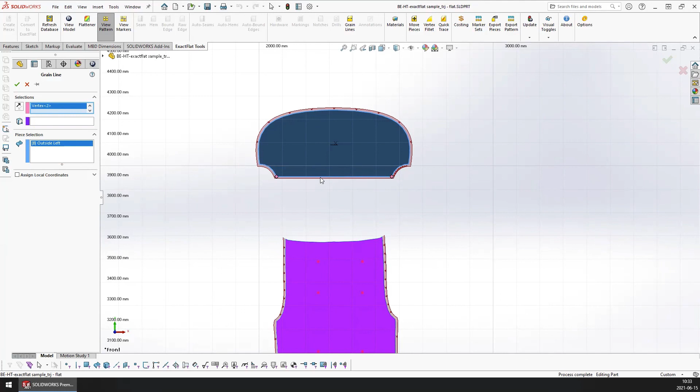For this part, we want our part aligned to this edge right here. Over here in selections, I can now pick vertices. I'll pick that vertex right there, and that vertex right there, and that's going to create a grain line between those two vertices.

If I close the tool, we can now see our grain line preview has appeared, and that's telling me I have a grain line on this pattern piece running in that direction.

Down here, I may want the grain running vertical, so I can do that again using vertices. I will open up the grain line tool, select this piece, and for my selections I will pick that vertex and that vertex right there.

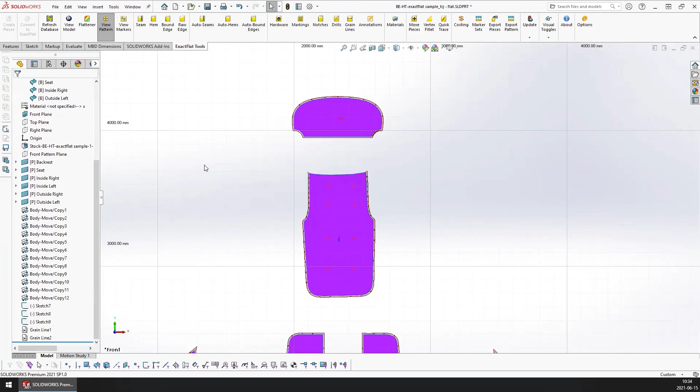When I close the piece, I now have my grain line running vertical. If I want to assign the same grain line to multiple pattern pieces, I can do that.

The easiest way to do that is simply to create a sketch and use a line segment to represent your grain line. So to do that...

Just create a sketch. I'm going to use my front plane here, create a new sketch on it, and let's say I want my grain line to run at an angle on these pieces.

I can create a single line segment at whatever angle I want, and I can use this line segment to act as my grain line.

Now I will open up my grain line tool. For my piece selections, I will select the remainder of the pattern pieces here. And now for my selection, we don't want to select the sketch itself, we want to select the line segment on the sketch.

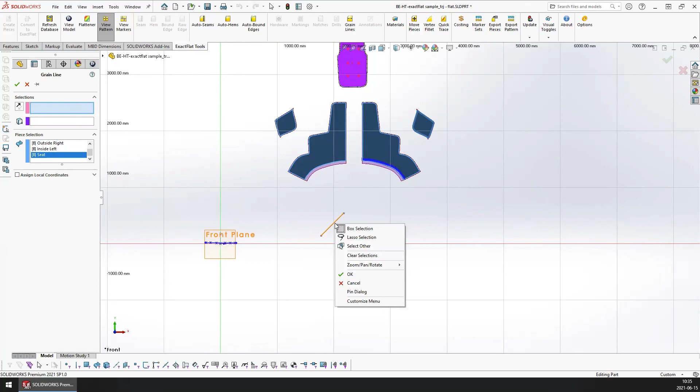So right click on the sketch, go to Select Other, and make sure you're picking the line segment on your sketch. Once that's done, ExactFlat will project that sketch onto the pattern pieces and assign that as the grain line for all our pattern pieces.